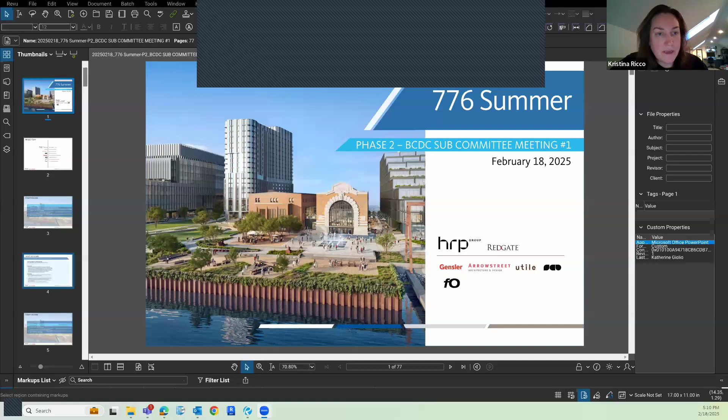Next slide. Quick glance at our project team, who Kristina is trying to feverishly onboard. Today, the focus will just be with FO and Gensler, as we'll be going through the agenda in terms of public realm and urban form. But just as a note, we do have all of the project team members here in the event there are any building-specific questions. Next slide.

For tonight, we understand we're the only item on the agenda. Thank you for that, and we want to be able to talk you through our material here.

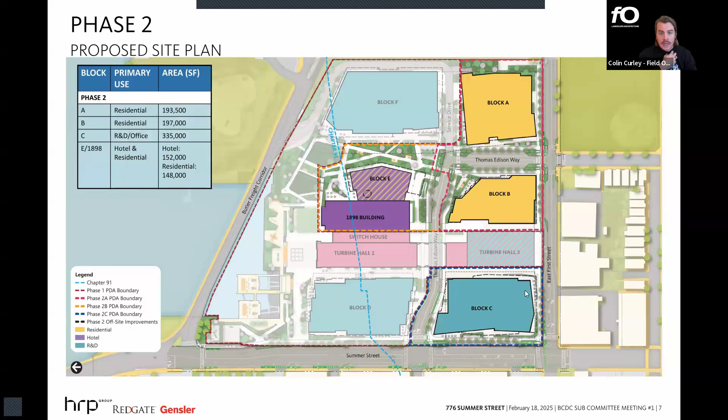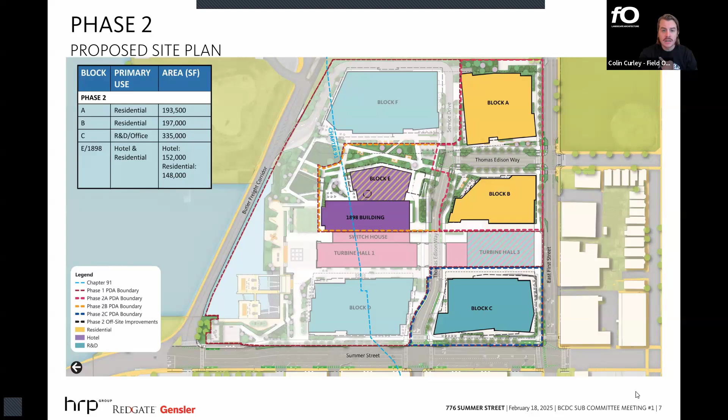Now looking at the phase 2 development: blocks A and B as residential buildings, block C as another lab office building, and block E together with the 1898 building as a hotel and residential building. Public realm is really the spaces around these buildings, streetscapes, and the Edison Plaza between blocks E and F. The next slide shows both phases together and the overall full build vision.

Moving to the next slide, we'll start by going through public realm. I'll start with this overall context slide, situating our public open space within the context of South Boston.

Next slide - let me speak to this one before we jump to the sections, to give an overall orientation. Our site high point is up at block A at elevation 36, and then the site slopes down like a table towards Summer Street. We're at elevation 21 at the freight corridor in Summer Street, and also at elevation 21 at the intersection of East First Street and Summer Street. We have a local high point in Summer Street at 22, where Thomas Edison Way comes out.

We're at elevation 30, where M Street and East First Street meet. Those are setting a lot of the elevations we're meeting at the edges, as well as what we're able to do in terms of taking up those grades on the interior of the site.

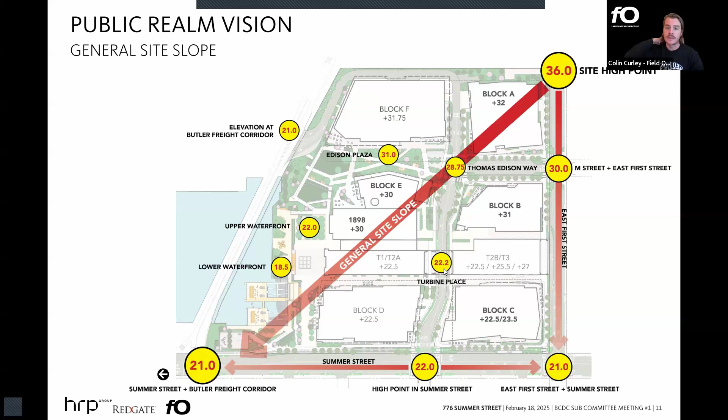Two other quick spot elevations I'd draw your attention to are the 28.75 at Thomas Edison Way, where we're meeting East First Street, and then we need to come down and meet the turbine halls down at elevation 22.2. So there's some stress on that portion of Thomas Edison Way.

If we could jump to the sections, we can set a little bit what's going on across the site. This site section is cutting through Block F and the lower waterfront. We have a tiered waterfront strategy for resilience. On the left-hand side of the section, there are some terraced lawns making their way down, and the lower waterfront is at an elevation of 18.5.

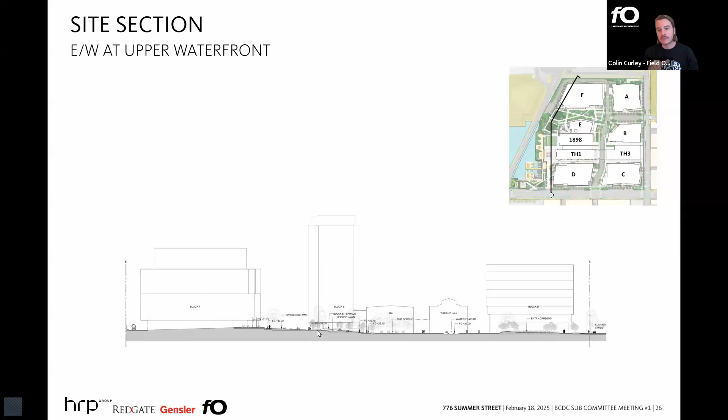If you go to the next section, this one's cut up a little bit further, cutting through the upper waterfront, at around elevation 22. On the left-hand side, there's a series of sloping lawns and pathways making their way from the Edison Plaza down to the upper waterfront.

Next section, this is Turbine Alley. This is fairly level, we're keeping this all around 22.5, consistent with the waterfront. However, there's a tiny blip here - we'll see it in 3D later - but we do need to make a grade transition to meet East First Street on the left-hand side of the page as it's climbing up.

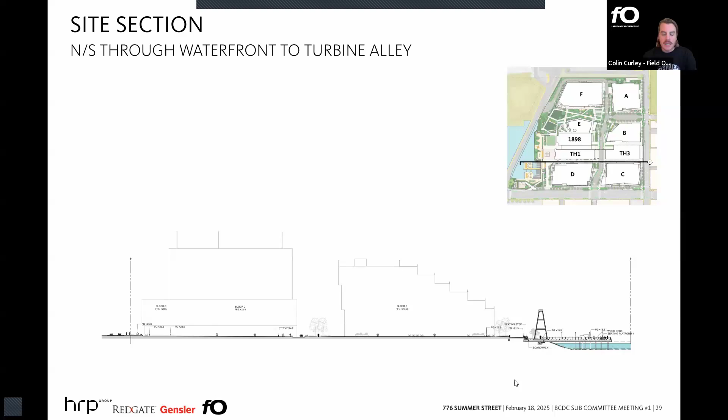The next section is just mirrored, so now you're looking back towards Blocks B and E. Grades here are holding pretty steady and then sloping down towards the waterfront on the right-hand side. I think that's it for sections.

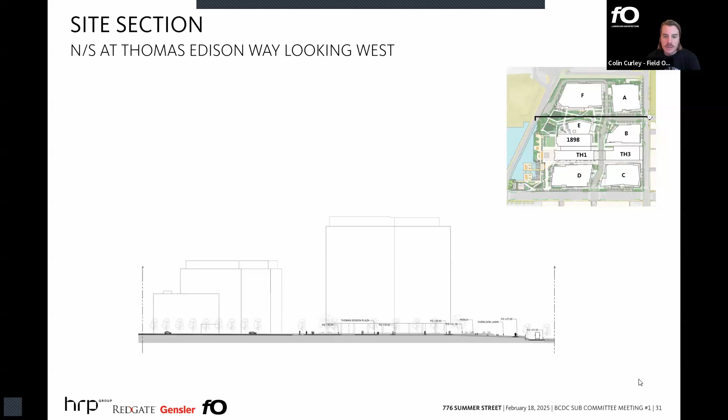But here again, just wanting to point out the grades around the perimeter - 22.5 at Turbine Alley, 30 at M Street, 36 at A. So we're working internally to try to set these elevations to maximize the amount of street frontage that each one of these blocks is able to have, to strengthen the connectivity to the public realm and surrounding streets. The next two slides are just enlarged grading plans we can come back to if we need to.

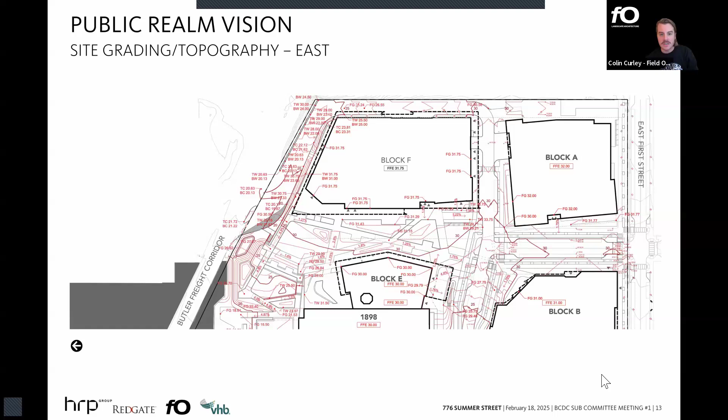If you go to the next slide, we have a series of 3D drawings to help walk through some of the grade change here. This is related back to the overall open space precincts. You can see the Edison Plaza, as I was mentioning in the sections, hovering largely at around elevation 31.

At the center of the site, the turbine precinct is predominantly at about elevation 22 - that's Turbine Alley. We're really trying to meet that elevation, though it does climb as you make your way up to Thomas Edison Way to around 27. The lower waterfront, as that first section indicated, is a bit lower at 18.5.

The upper waterfront generally at 22, trying to keep that consistent with all of those buildings as well as Turbine Alley, but it does climb up again to meet Edison Plaza. And then the Summer Street Gateway, really looking at meeting the grades of Summer Street.

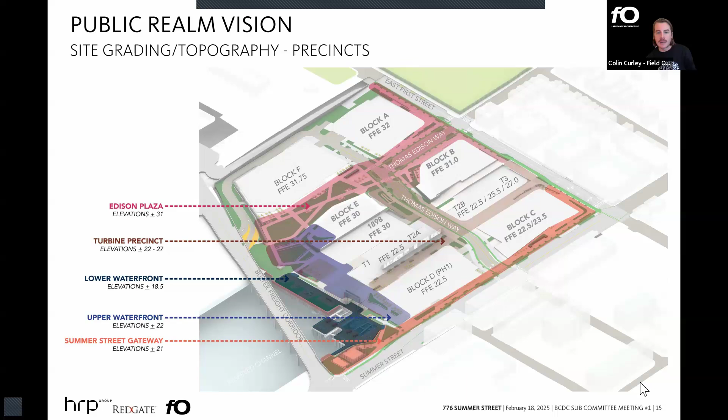Also looking at areas where we are taking up some grade to meet resilient finished floor elevations for blocks D and C. If you go to the next slide, we'll walk through some 3D views. This is looking southeast at the waterfront. You can see that kind of tiered waterfront strategy, upper waterfront around elevation 22, lower waterfront at 18.5 with accessible slopes mitigating the grade transition there, and block D and Turbine Hall at 22.5, 1898 being up at elevation 30.

So when we turn and look the other way on the next slide, you can see 1898 at elevation 30 together with block E, relating to that elevated public realm associated more with the Edison Plaza. And then those lawns and sloped walks that are making that grade change happen from elevations in the 30s down to 22 at the upper waterfront.

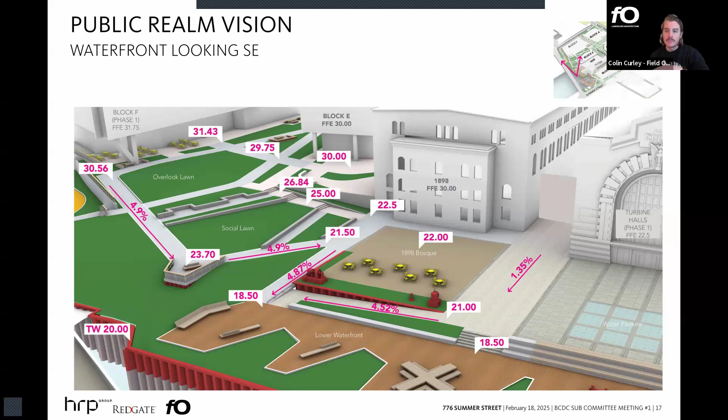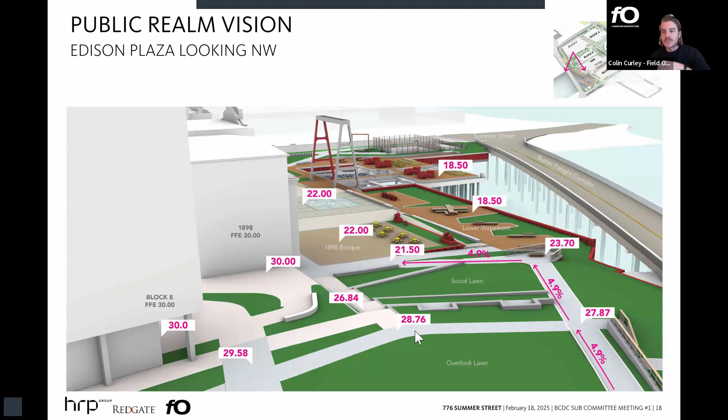If we go to the next slide, this is now turning and looking back towards the waterfront with that kind of overlook lawn in front of you. Block F would be behind you. So you can see here holding an elevated public space at block E and 1898 at around elevation 30, and the lawns and sloped walks making their way down to the upper and lower waterfronts beyond.

Next slide turns and looks down the Edison Plaza towards Thomas Edison Way. Between blocks E and F, this is a relatively level plaza. We've got seamless grade transition across and into building finished floor elevations, E being at 30 and F being at 31.75.

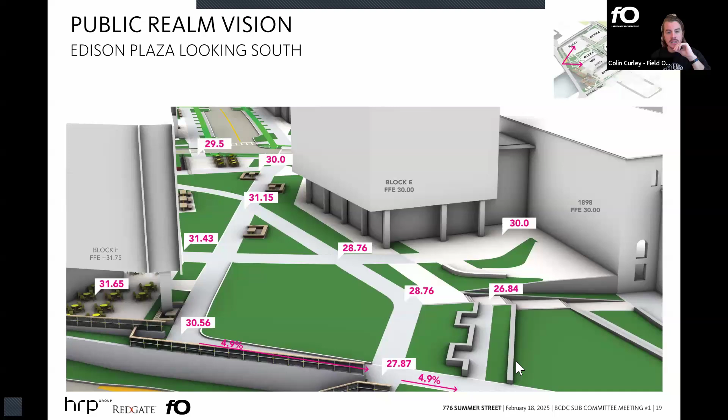We go to the next slide. Now we're moving into the intersection of Thomas Edison Way. I apologize, please disregard the 24 and 22.7. Those are errors, should not be there. That is nowhere near where we are.

We're up at 29 and 30 at this intersection. You can see the 31 off to the left. That's near the entrance of block B, so that's what's setting our finished floor elevation there. We're continuing to study this corner from a design standpoint, but here we're looking at a split strategy of an elevation 31 area associated with the building and a more public space down at 29.

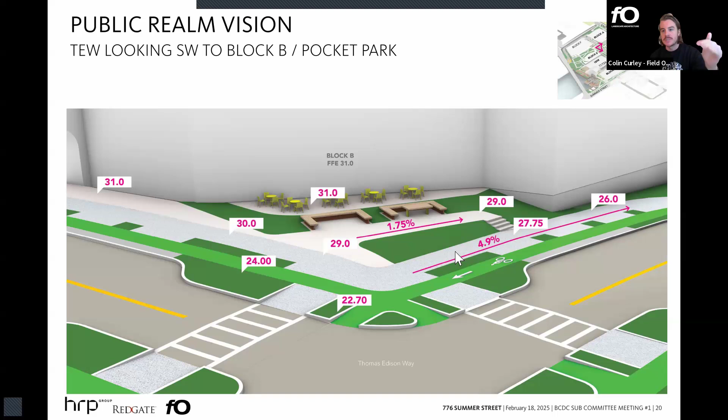But I mentioned before the stretch of Thomas Edison Way that's got some stress on it. You can see that really from that intersection going down, we're maxing out our sidewalk slopes to get down to the turbine halls. So if you go to the next slide, this is now turning and looking at block E.

Again, the kind of maxed out accessible slopes along the sidewalk so that you can make your way down to turbine halls, but then also creating that flush hotel and residential drop-off zone, meeting block E's finished floor at 30. So we have a 4.9% slope coming up to it. We've also introduced a stair and switchback path in front of the drop-off there that provides direct entry in line with the hotel.

So bringing you up to that flush pickup drop-off zone. And then you can see in the background there that driveway diving down to meet the loading elevation, and then the plaza again hovering at around elevation 30. The next slide just switches around, looks from the turbine halls back up. So you can see really the sidewalk being that accessible path of travel coming from the turbine halls up to the Edison Plaza.

That switchback near where Kate's cursor is right now being the kind of accessible path, taking you back up in a more direct route to the hotel entrance. And that 9.5% slope there being for vehicles coming back down, headed either to Thomas Edison Way or to parking.

Next slide. Colin, while you're on that one, slide 22 - yes, I know we chatted a little bit two weeks ago about the service drive, and is that kind of what's in the front of that slide? I guess yes, so that's coming off of Thomas Edison Way.

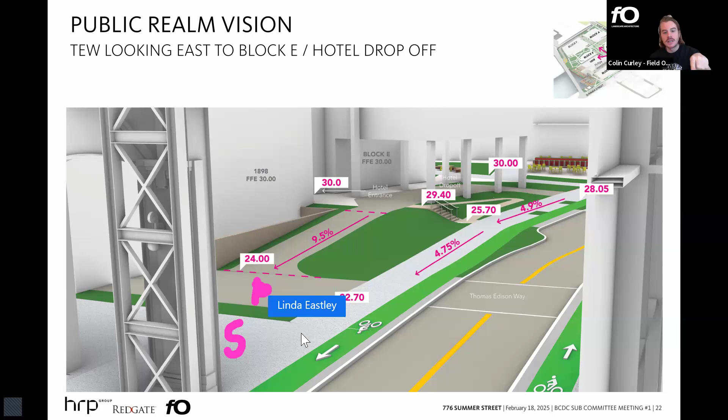So yes, this is service and this is parking. The tan is both service and parking for 1898 and the hotel. They're just separated by that planting strip. Got it.

So next slide, this is Turbine Alley. I mentioned the East First Street elevations are coming down. Where Turbine Alley meets East First Street, it's around elevation 25, which was already accounted for in the design of the turbine halls, so the turbine hall elevation at that corner is 25.5. Block C on the ground floor is at an elevation of 23.5, splitting the difference between Turbine Alley and Summer Street. That creates this condition at the corner where we have tiered seat walls providing a continuous flush accessible entry into the ground floor of Block C, and also facilitating the grade change from East First into Turbine Alley.

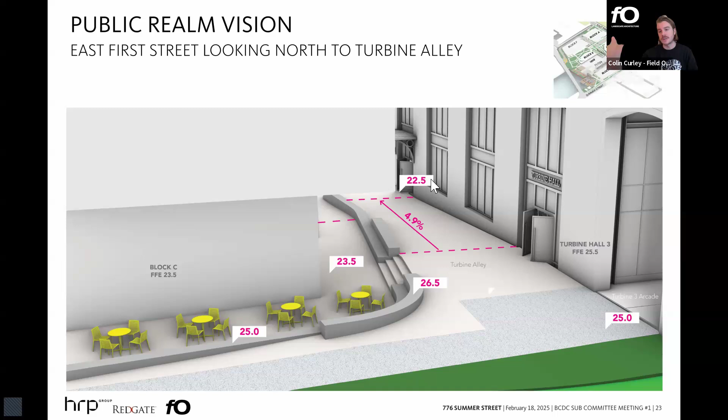Where you see the 22.5 tag, that's the finished floor of that entrance into the turbine halls and the remainder of the turbine halls as they make their way to the waterfront.

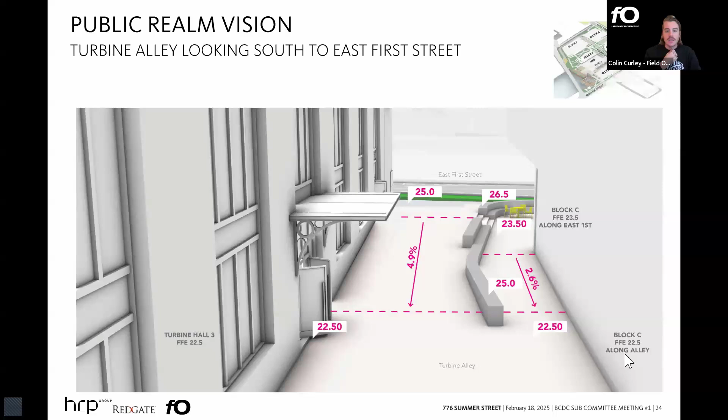So the next slide just takes that same view and turns around. You can see the seat walls mitigating that grade transition from the 22.5 of Turbine Alley and the rest of the turbine halls, up to Block C at 23.5, and back up to East First Street at 25 in the distance. Next slide, those are the sections.

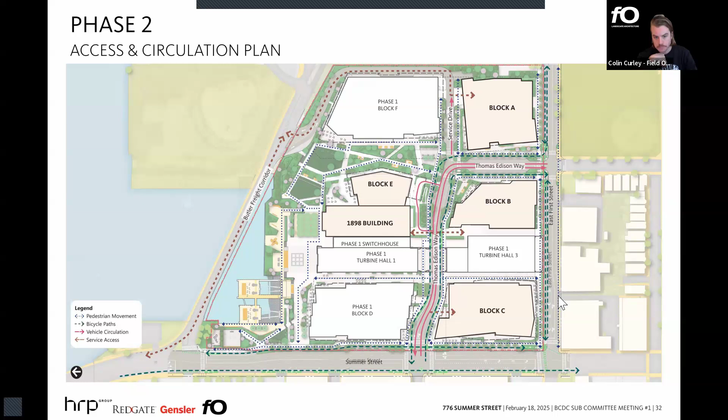And to your question, Linda, we'll talk through quickly the overall circulation, parking, and loading across the site. The red lines are the vehicular circulation along Thomas Edison Way, as well as that loop for the hotel pickup and drop-off at Block E. The brown lines are the service access, so for many of the buildings that's coming from Thomas Edison Way or the service drive via either Thomas Edison Way or the freight corridor. The dark green lines are the bike circulation, and the dashed blue is the pedestrian movement. The next slide illustrates the parking and loading entries.

And I think with that, I'll pass it over to the Gensler team.

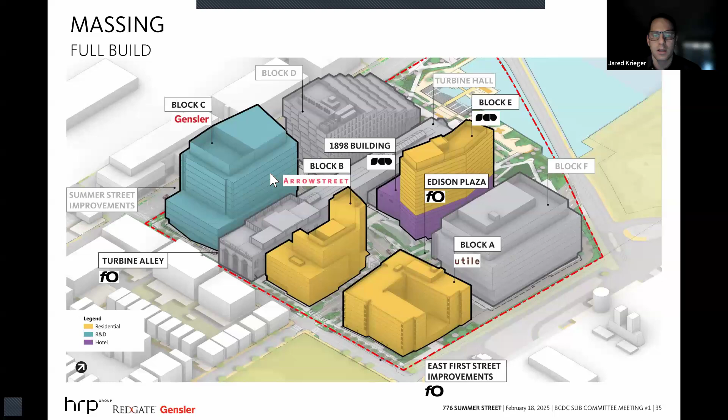Ultimately, what we're calling just a really hardworking street, as well as orienting active uses both on the outside of the site and the inside of the site.

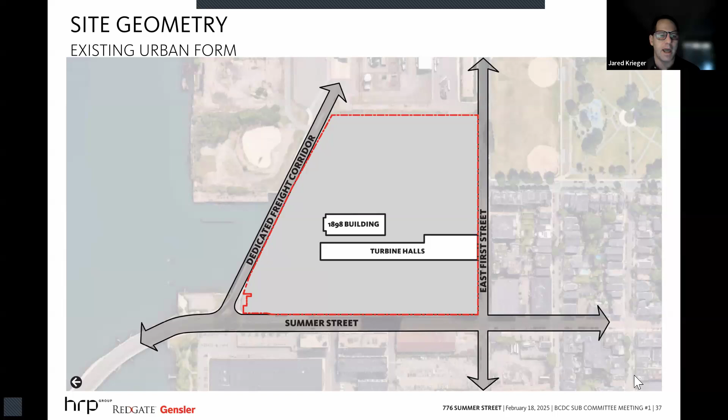Starting with the progressive build of the site, the rectilinear edges create the perimeter, with East First Street and Summer Street coming together at a right angle. The dedicated freight corridor cuts at an angle through the site, setting up the boundaries. The 1898 building and the turbine halls are historic, rectilinear, and really unique assets that the site has.

As we started with the planning, other groups collaborated on this with the team. Elkins Street and M Street were meant to cut through at 90-degree angles, keeping it orthogonal like the site, but there were certain site constraints that prevented that from happening.

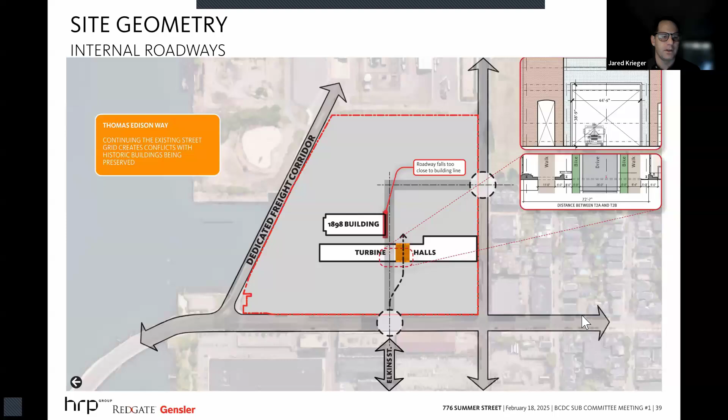When you looked at trying to get a road through the existing turbine halls, we jogged the road to the south to coordinate with specific structural bays, trying to coordinate lintels and removal of structure, while balancing how close we were to the 1898 building. Fitting a roadway, sidewalks, and bike paths through appropriately, while giving a buffer to the 1898 building, led to the geometry being a little more dynamic and jogging to the south.

The benefit was enhancing the pedestrian realm. We really want to celebrate the turbine halls by giving this buffer and stepping back from the 1898 building, because if the roadway ran directly through on the Elkins Street axis, there basically wouldn't have enough room for a road and a sidewalk — it would be right up against the building.

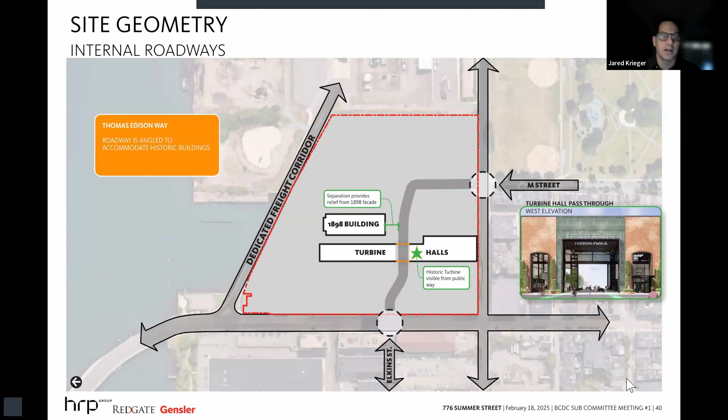This creates pretty unique geometry that activates and differentiates what's happening on the inside of the site versus the outside. This shows the setbacks and all the different energy created through Edison Way coming through on the site, rather than being at orthogonal angles.

Another big component of how the plan was devised was thinking through how we can connect from the existing Medal of Honor Park, showing a wider view of the multiple green spaces being connected. For a long time this site sat as a disconnecting point for potential pedestrian pathways, so this walks through connecting Medal of Honor Park through the site, not just focusing on the vehicle, but also the pedestrian.

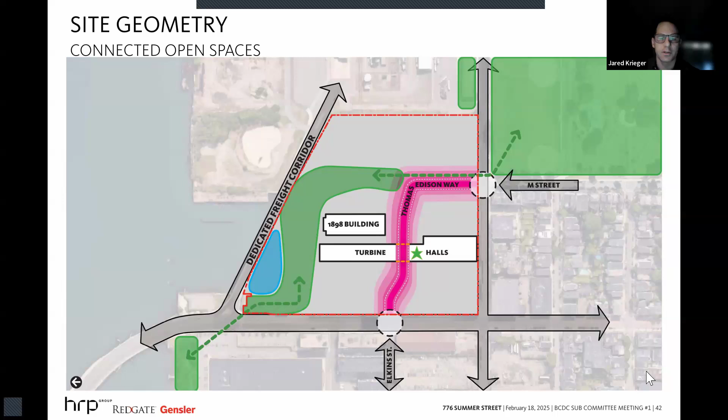Ultimately it created something really dynamic in the middle of the site. The commission noted last time that the circulation patterns meet at the intersection of Thomas Edison Way there, and we feel that's creating something unique, as vehicles turn one way or another while pedestrians potentially open up to views toward the open space and waterfront.

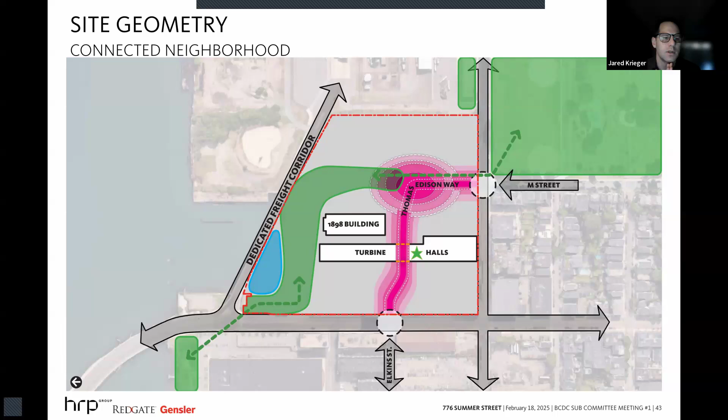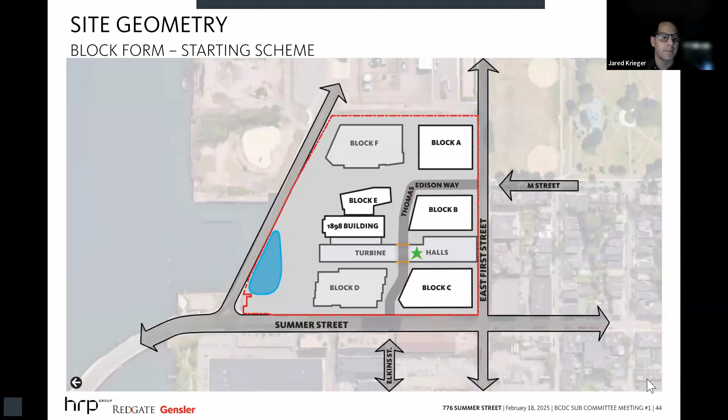Now, if we start to lay on some of the simple forms, this shows on phase 2 what the simple buildable parcel geometries could be. Then we start to layer in certain angles, pedestrian and view corridors to give visibility to 1898, and as brought up, the potential signature piece that is block E at the center of the site.

As the pedestrian gets further into the site from these critical vantage points, that starts to indicate some of the carving back for the buildings and driving the building geometries. As you get to Thomas Edison Way and into the plaza space, it continues to open up the views into the plaza and beyond.

When you're on the higher topography, as you come around, there are incredible views of the skyline and beyond. Same on block C — using that to our advantage, the angular roadway gives an excellent view of the turbine halls, but also gives us the advantage on block C to articulate the architecture to screen some back of house functions, like the loading dock area.

Layering it all together, it creates a really dynamic space right as you're entering the site at the bend of Thomas Edison Way.

That's where we really have a unique moment, and the architecture of the buildings is starting to address that. We're going to show this a little bit more in some three-dimensional views.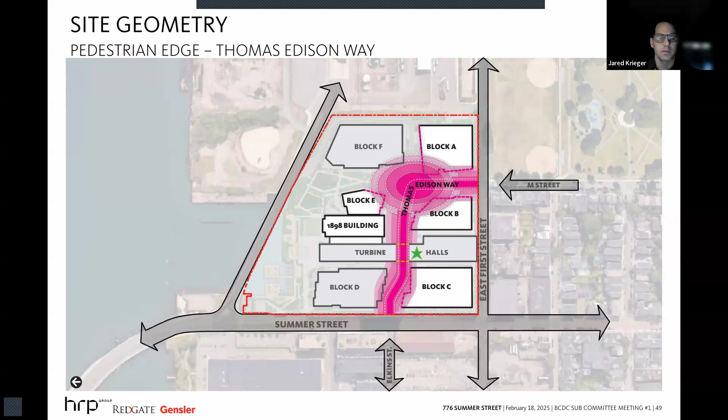On the outside of the site, along East First Street, one of the constraints we've had from the beginning is that turbine hall 3 basically sits right on the edge of East First Street, and there isn't any room for a sidewalk there. So that created a pretty unique opportunity, special to this site, to bring an advantage to the pedestrian experience by actually circulating through the turbine halls. As you've seen in earlier presentations, that's basically a connection throughway wall, while we preserve the turbine hall.

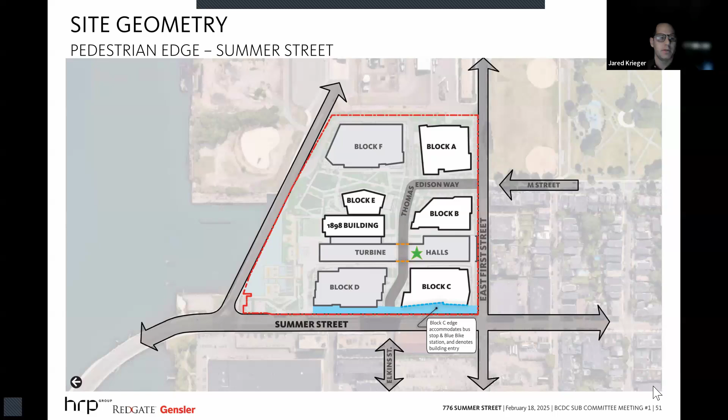This really enables the blue bike stations, adjacent to the program bike storage spaces within the building, to create synergies between what's happening inside and outside the building. Similarly along Summer Street, you'll remember block D from phase 1, where there's a push into the building, a notch, which denotes the entrance. We're making a similar gesture on block C, moving it in a bit more, also making room for the bike station, the bus stop, and the pedestrian circulation out there.

Ultimately, this is the full build of the geometry of the master plan, which we think, using some of the unique forces that drive the master plan, whether under our control or not, really creates something dynamic in the site.

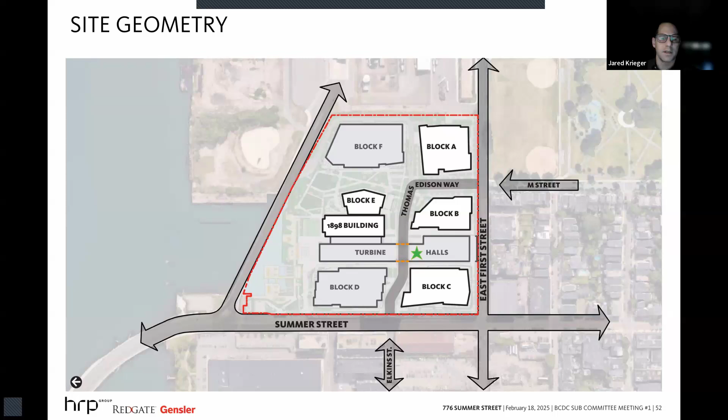The remainder of the presentation will focus almost entirely on the 3D pedestrian level experiences throughout the site. We're going to take you through 4 diagrams and 4 animations, which will take us to the finish line. Thank you for your patience in this thorough presentation.

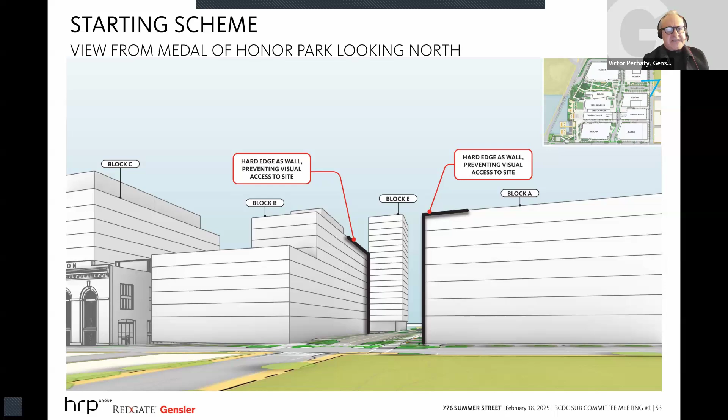This first view is focused on the experience looking into the heart of the site from Medal of Honor Park. The building forms you see are based on the zoning-defined envelopes. If I can call your attention to the dark outlines on blocks B to the left and A to the right, those are the areas you'll see begin to get modified based on the criteria shared by Jared.

Next slide, Kate. This is the proposed view that indicates on block B the upper 4 levels have been recessed to separate an upper portion of the building from a base. Block A has been subdivided into 3 different massing forms. The form in the foreground has been rotated to help open the view and frame the view beyond. Block E has taken on a small angle, which will be viewed better in the diagrams to come.

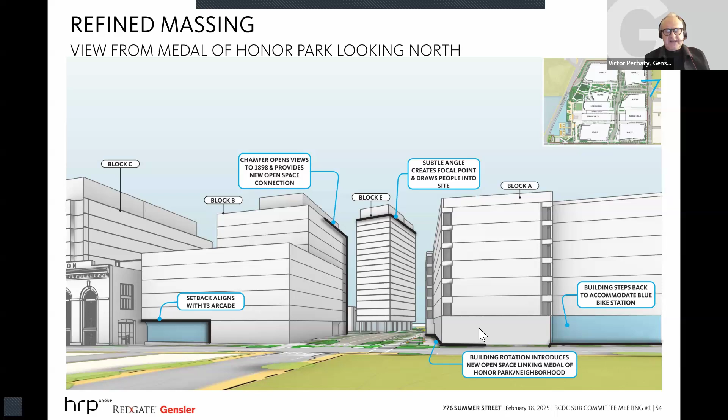Next slide. So what we'll do next is show you 4 slides that will preface the 4 animation paths that we will take through the site. And Kate, you can go to the first one.

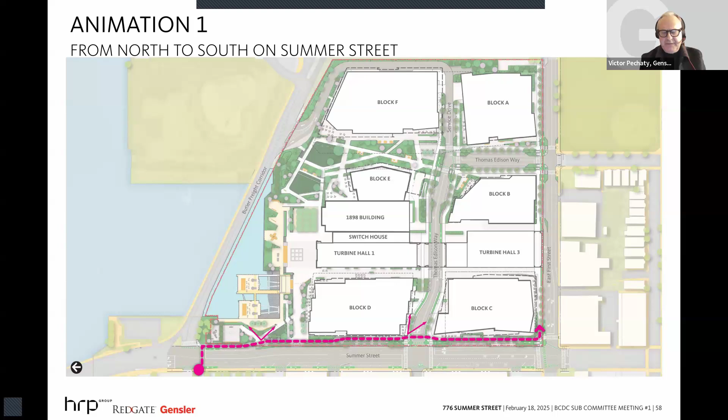Basically, 2 of the animations are going to focus on the primary site perimeters, and 2 of them will go right through the site. The first animation will walk along Summer Street, beginning at the north and moving along the blocks towards the south. The next animation will take us all the way along East First Street, going from west to east.

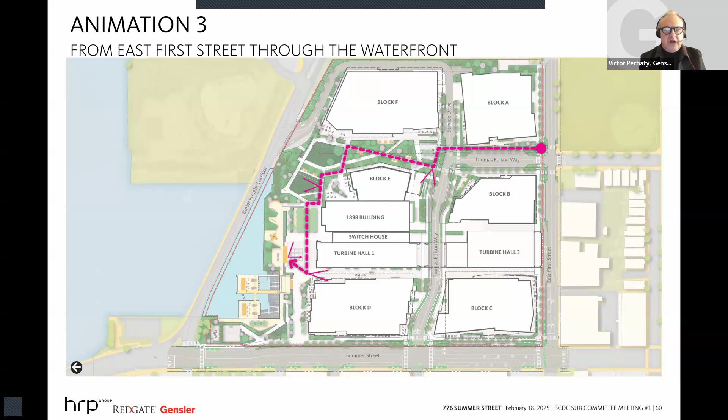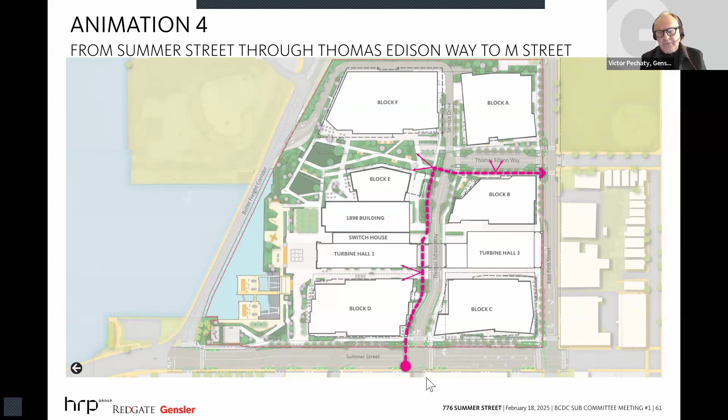Passing through the Turbine Hall 3 arcade and the buildings on either side of it. The next path will take us from Medal of Honor Park along between blocks A and B, and has chosen a path to navigate through Edison Plaza and along the waterfront experience. And lastly, we'll enter the site at the intersection of Summer Street and Thomas Edison Way, follow Thomas Edison Way the entire way through the site to the point where it makes a right turn in Block E and reconnects to East First Street. So if technology cooperates well, Kate, let's go ahead and kick off the first animation.

Thank you. So here we're going to cross over Summer Street, looking eastward. As we turn to go south, we're going to walk by a dog park and an outdoor recreational sort of half-court basketball court to our left.

As we pass by that, we will turn towards the east to get a quick overview onto the waterfront promenade. You can see some of the historical artifacts that will be preserved from the Edison power plant.

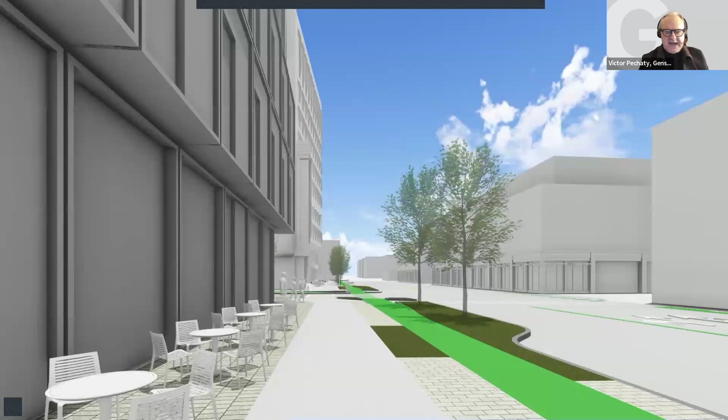Now, as we walk along the facade of Block D, this is the inset portion of the mass that frames and signals the building main entrance. And then the remainder of Block D at the sidewalk level is set 5 feet back from the setback to help provide some better indoor-outdoor relationships.

Here we're arriving at the Summer Street, Thomas Edison Way intersection with the 4-story base of Block C beyond that we're passing by now. The west face of Block C folds inward from both intersections, again, to signal architecturally where the building entrance is, create an alcove for the blue bike stations, as well as a linear plaza that will welcome transit riders that are getting off the bus on Summer Street.

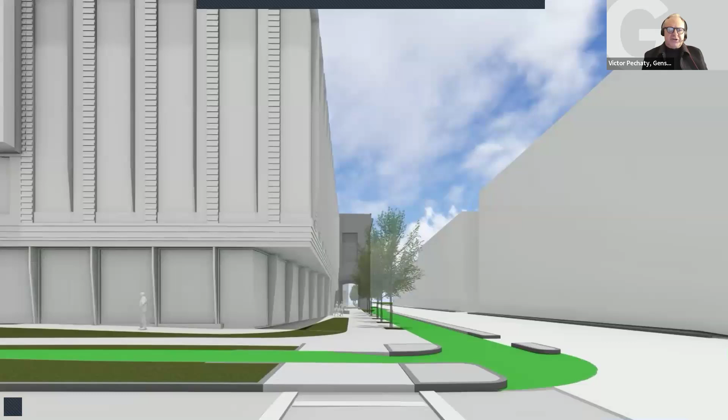Okay, Kate, whenever you're ready, we can go to the East First Street animation. Thank you. So this one's a better view of the 4-story tall podium at Block C, which helps bring down the scale of the 10-story building.

The first level of Block C folds away from the setback line. Here we see it folding toward Turbine Alley in deference to the new arcade that passes through Turbine Hall 3.

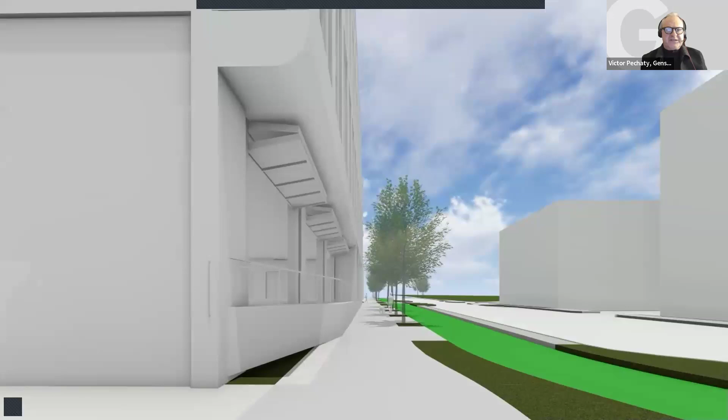On the other side of the pass-through, Block B also has a recess at the base to ease the transition from the arcade. As we move along the first level of Block B, we haven't coordinated doors and access yet, but those are all storefront retail openings.

Here, we're crossing over Thomas Edison Way, and to our left, this provides a good view of the plaza created by the rotation in the Block A mass, and we can see the view towards Block E beyond.

Finishing the journey along East First Street, you'll see Block A pull back from East First. It's something Jared mentioned in the plan to create a generous alcove to host the blue bike stations, the storefront behind those providing some of the bike amenities for residents in the building.

Okay, Kate, whenever you're ready, we can jump to the waterfront experience. So we're beginning with Medal of Honor Park to our back here, and we're walking northward along Block A. The Block A Plaza extends to the Block A residential main entrance, which was just off to our right.

As we continue to move north, we're going to turn briefly down Thomas Edison Way to show the portal through the turbine halls in the distance.

As we cross over and move a little bit to the west, it'll bring us closer to see the porte cochere drop-off that serves the Block E hotel and residential.

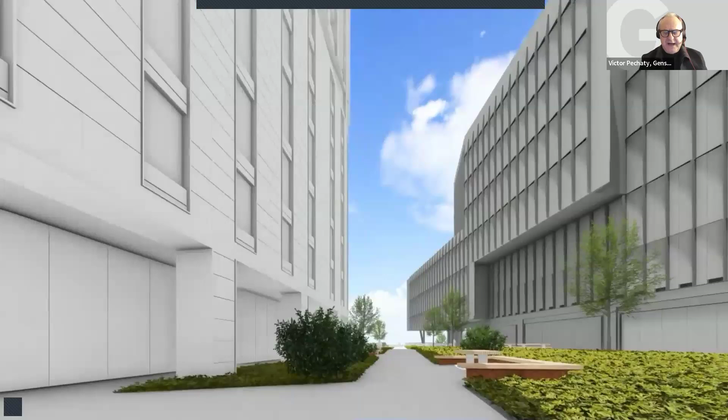And now, once again, looking towards the north, we'll pass through the Edison Plaza as we make our way towards the waterfront. The inflection point on Block E folds back away, really allowing a wide open view of the waterfront from Thomas Edison Plaza.

Here, we'll turn left back towards the west and walk down the terraces of the waterfront promenade as we negotiate the elevations and the various terraces that Colin had shared earlier.

As we get to a lower elevation, we're going to flip the camera back and you will see some of the new large openings that are proposed for the 1898 building to really open that up to the bosque of trees that we are walking through right now.

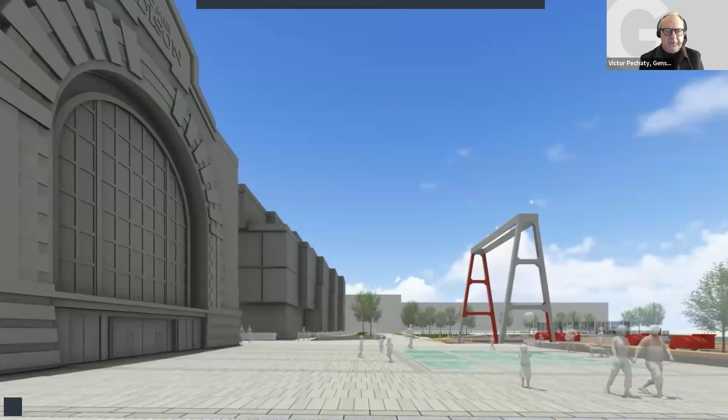I forgot to mention something very important. These dark gray masses focus on the phase 1 buildings, and the lighter gray are phase 2. That was something you requested, and I apologize, I didn't mention that earlier.

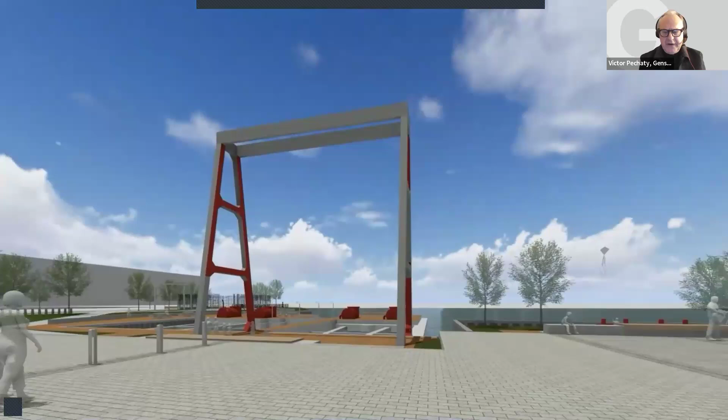Here we're going to turn all the way around, and in our foreground will be a proposed water feature that's part of the front plaza of the 1898 building, and we'll stop seeing the Turbine Hall 1 facade in our foreground and 1898 directly adjacent to it.

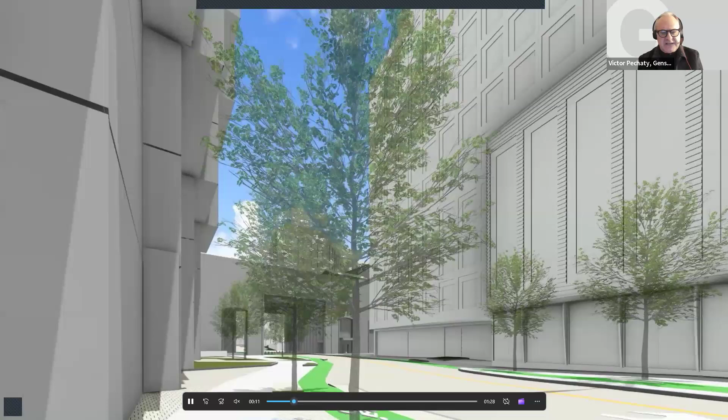Okay, one more to go, Thomas Edison Way. Here we're crossing Summer Street, and we'll follow Thomas Edison Way throughout the site. You can see the entrance into the site bookended by the 4-story prow on Block C, as well as the massive Block D. We'll follow the sidewalk along the serpentine jog in the street that frames the approach into this portal.

The portal is designed such that—Kate, may I ask you to go back a little bit? It jumped for me just a bit. Just a little bit of a glitch there.

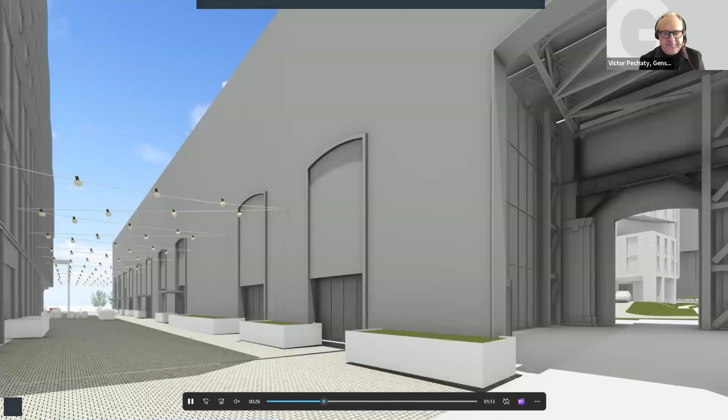Thank you. So here we get a peek down Turbine Alley towards the waterfront, and then through the portal, it has a nice separation between a pedestrian-only experience as well as a vehicular experience.

This movement provides a good view and experience of walking up the grade to the higher point of the site, with the porte cochere to the hotel framed in the view now. You can see the car as if it's exiting the hotel drop-off.

As we arrive at the higher point of the site, we'll take a quick look to the left, which looks out onto the waterfront. And then we will turn and walk down Thomas Edison Way towards M Street, where we'll see both the base of Block A and Block B.

Both blocks are lined at the base with transparent storefront that is all active program, one of three programs: either retail, building amenities, or building lobby. So all of this entire experience along Thomas Edison Way is highly activated. And we're stopping here looking west on East First Street.

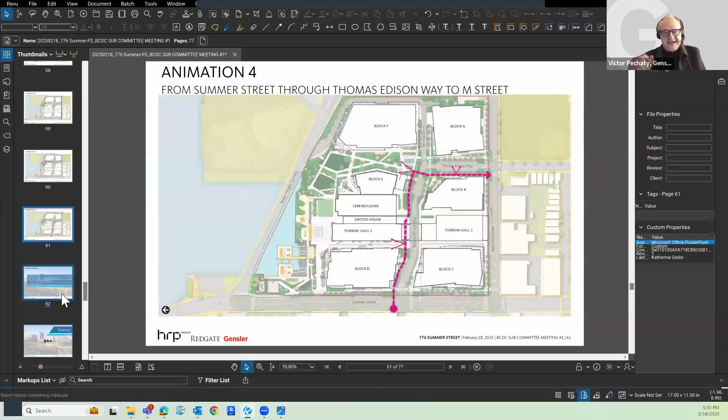Thank you for listening to that marathon of narration. Melissa, I'll pass it back to you for, I believe, our closing slide. Or Ernst, I'm sorry. Nope, all good. Appreciate that, Victor. So appreciate the patience.

I'll echo Victor's comments there, commissioners. I appreciate the patience through that, but we do hope that we were able to provide a lot of the views and thoughts and ideas that you'd presented prior. With that, Christina and team will turn it over for any questions and answers.

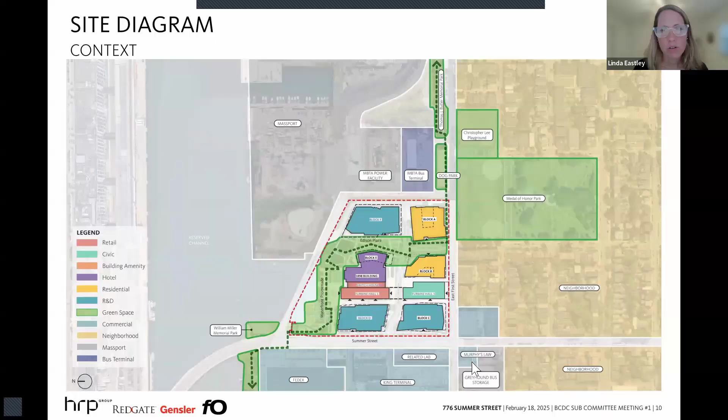One of the things I was looking at was slide 47, if you don't mind going there. In slide 47, we see a much simplified geometry of Block A, and in some ways it's more in keeping with the geometries of B and C because you've got more sides that are parallel to one another. I know one of the things we talked about two weeks ago is why we have the twist in Block A, and the reason this is coming up for me now, and why I wanted to look at this diagram again, is that I'm not really sure how to think about that Service Drive spur.

It either wants to be a pedestrian realm or it doesn't. I think having Block A twist and offer a pedestrian realm there is a bit confusing, because I don't think it's really a block you're welcoming pedestrians into. So I think it all gets connected, and I wonder if the team could think a little about how we change the primary nature of Thomas Edison Way and the way it makes that 90-degree turn out to East First Street, and how we think about that Service Drive spur.

Can there be some visual cues that tell a pedestrian that block really terminates at a dead end, and maybe has a different streetscape character, so we continue to focus on the primary nature of Thomas Edison Way. So for me, having a simpler Block A and a different street section for the Service Drive go hand in hand in providing clarity for the primary Thomas Edison Way.

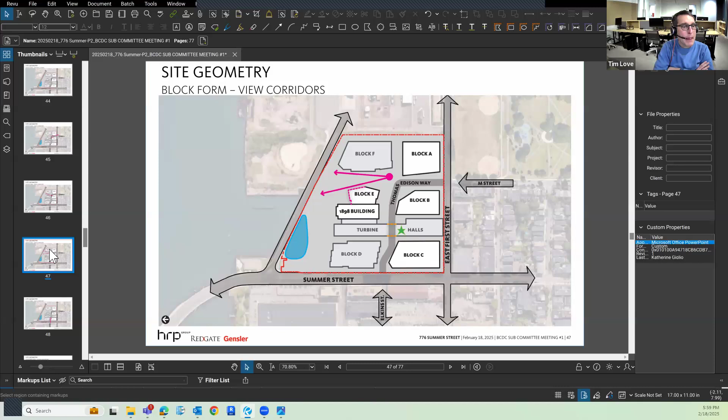Yeah, and I think that was slide 36, maybe, Tim. At least that's what I jotted down. Yeah, so again, the street section looks really similar to me, further down Thomas Edison there. And then any comments on the turbine alley?

Yes, we would at Gensler also be pleased to speak to that. That's sort of the realm we're working on between Block C and Turbine Hall 3. We could start that conversation now, but I am noting that other commissioners have comments. So should we hear those first and come back to it?

Well, I guess at the most elemental level, even if you look at this illustrative, there's really nothing interesting that's being shown here in terms of the urban experience along Turbine Alley. So I'm just curious about that, curious why it's not part of that open space diagram we looked at a second ago, and kind of what your thoughts are.

Yeah, and I could jump in, Victor. From the diagram's perspective, it was kind of linking some of the major open spaces. Linda, what you had said earlier, we totally agree that it's an important space for connecting, especially if you're coming from east of the site along East First Street.

I actually think it's going to be a very impressive alternative to going down Summer Street and then turning right into the site. You probably saw it in some of the 3D views better than kind of the diagramming. We actually agree that it's going to be a very special experience.

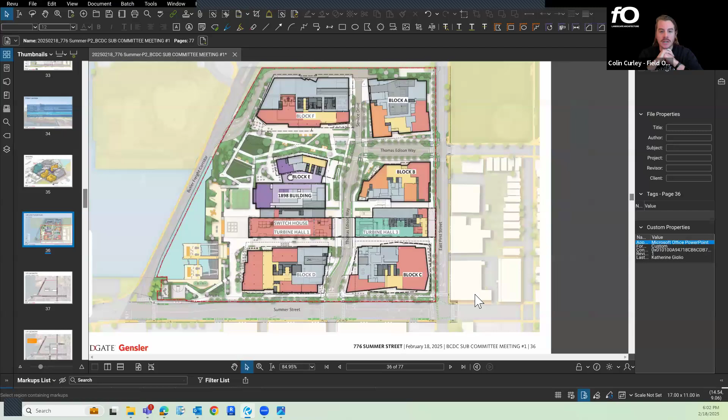And so I think we've been trying to think about it sort of in its entirety—where is the destination, where do you want to stop, and where are you kind of passing through. But definitely comments are heard, getting into more of what the character of that space really wants to be along that stretch.

All right, great. I mean, your graphics may just not have caught up to kind of some of the ideas that are bubbling. Sure, so look forward to seeing that in the future.

Shauna, I saw your hand up earlier, but I don't see it anymore. No, it was it. I took it down just because I thought it was time for me to start talking, and I usually forget to take it down.

So thank you. And I think the presentation was extremely exciting. There was a lot of information. It was a little hard to follow just because there was so much information. And I think it's an extremely exciting project.

I might as well start with Turbine Hall. I was actually going to end up that direction. No, actually, I'm going to start with the other spaces and then come back to Turbine Hall.

I think that's a very exciting project. When moving through the green spaces, what's called the Thomas Edison Plaza, but is primarily green, and a lot of the other spaces—it may just be the focus on grading and representation—but a lot of it felt more like passage spaces and green spaces. It could possibly be just the level of development the project is at, but I'd like a better sense of how these spaces are subtly differentiated from each other and what actually takes place in those spaces.

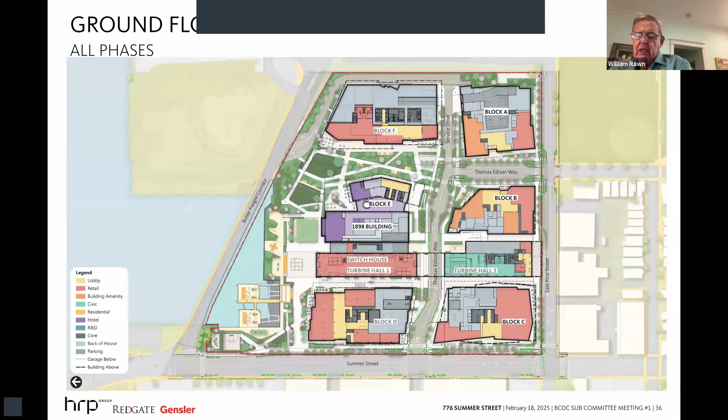Can you show me a view looking from the north down Summer Street to the edges of Block D and Block C? And this would be elevation or perspective. Kate, I'm almost thinking that if we go to our animation and pause it, that might be best for what Commissioner Rawn's looking for. Perfect, Victor.

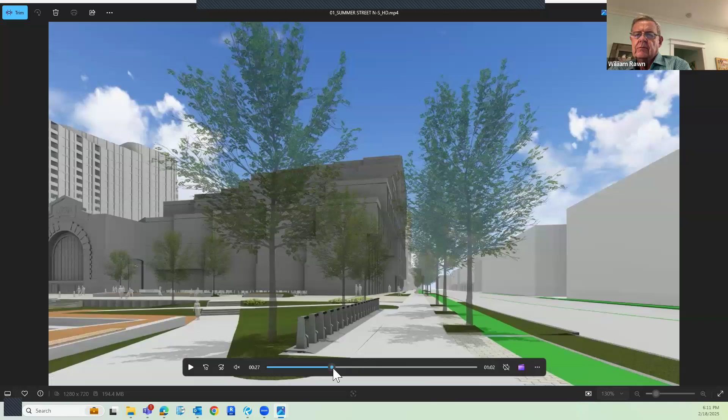Okay, well, let's stop right there, and then we'll let... now can you back up a little, Kate? Okay, we can stop there, and then we'll go down the block a little more.

I am troubled by what seems to be a pattern of architectural moves here, of having the upper floors extend over the sidewalks in a way that makes those upper floors feel bigger and heavier. So you see that—I'll call it the third floor overlap here, and then the fourth floor overlap.

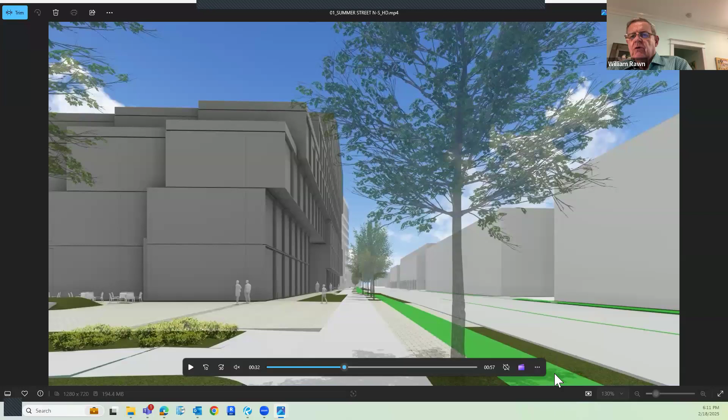Then go down the street a little farther, Kate. Here it comes again at the second level, and then keep going, please. All the way—why don't we go to building C?

Okay, and right here is fine. So these are 3 or 4 examples of where the upper floors extend out over the open space. And I'm feeling these buildings are big. We grant you that, but at the same time they're potentially quite handsome. And I don't remember that building C two years ago had that much of an overlap over the spaces below, but I could be wrong.

But I'm finding this repetition along Summer Street of extension of upper floors to be disconcerting if one's trying to master the question of heaviness and mass and girth of the project. And so I would love someone to explain why these overlaps are necessary architecturally and whether they can be reviewed.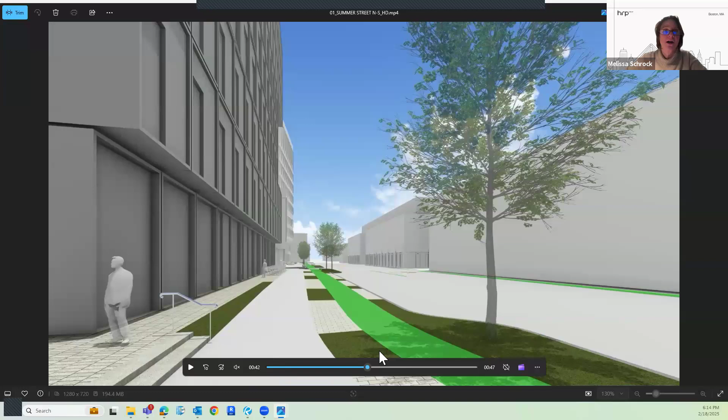And how about building plot site C? D is... Block D is within the footprint and the mass that we have been looking at for many years. In fact, it's under the square footage that was originally approved in the master plan. We went through the phase 1 approval with Payette, the architect of this building. They're not here tonight because we've already been through the BCDC process and the BPDA board with them.

So those insets that you're referring to were actually design moves that we worked on largely with you guys, but also with BPDA staff, in order to create a little bit larger public realm and also to denote things like where the entries are, where the corner is as you're coming up to the street. Those were specific design moves worked through quite some time ago.

Well, I apologize for bringing up something one can say we reviewed and approved—it's okay—but I must say, if we're looking at these buildings again, I'm just finding them seem much heavier than I remembered, and so I was trying to figure out why. Maybe I'm wrong on how I assess that, but I do find there's a heaviness and not a lightness to these buildings whatsoever along Summer Street. And I'm worried about that.

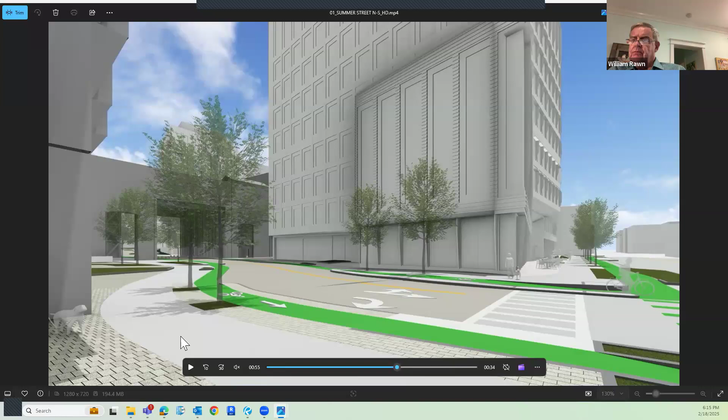We hear your comments. I would just hope that we're not going to relitigate Block D, because it's in CDs at this point. And Victor, I think you could probably address some of the commentary on Block C. Yeah, so just a quick summary of where we are here on Block C.

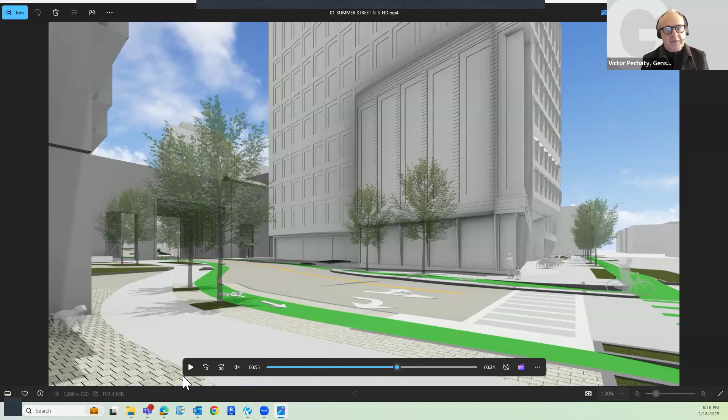We have a series of diagrams that I'm sure we'll come back to when we talk architecture, but we essentially began with the zoning envelope and then carved away at it in multiple areas through this folding morphology. On the Summer Street facade, there are essentially two intersecting moves.

So what we can see here is the outermost point. The outermost point on what we call the upper mass is the only point along that facade that actually touches the 30-foot setback from Summer Street.

In order to address some of the comments on heaviness, we created this crease in the center and folded the facade away from that crease. So whether you're looking at the building from the north or from the south, you're really perceiving only half of that facade on your side of the crease.

And then at the lower portion, which creates the overhang, none of that base actually comes all the way to the 30-foot setback. It is all pulled back from the setback and then further folds inward to architecturally communicate where the building entrance is.

As I mentioned, this creates a linear plaza along Summer Street, both to give that pedestrian space a little breathing room, accommodate the bikes, and some outdoor programming for retail. Now, the resultant of those folds is that a portion of the upper mass hangs over the lower mass, which we think provides an inherent canopy and shelter for the entrance.

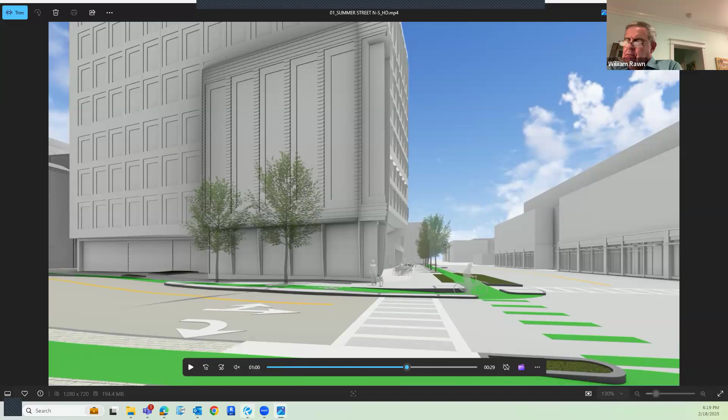Oh, thanks, Linda. Can we, first of all, I've got to join the chorus. This was really an excellent presentation.

And from the diagrams that explained your process and the animations, I'm thinking that when we have multi-building, multi-block projects, we should make it mandatory, if we can't have models and can't be together, to do that kind of walk around the site at its perimeter and through its major pathways as a pedestrian, exactly what you did. And I echo Bill.

You did it at a pace that most times when I see animations, I just want to tell you to stop, it's too fast. You get car sick.

Well, and I haven't absorbed it all yet, but the pace was really good. The thoroughness of walking around, I really do feel I understand it so much better.

Two or three things. Number one, if you could go to 47, which is the same one Linda asked you to go to. I found this to be very powerful. Is that 47? I'm sorry, then I got the wrong one. But I can use this one. Yeah, that's fine, maybe I have the right one. I have the right one.

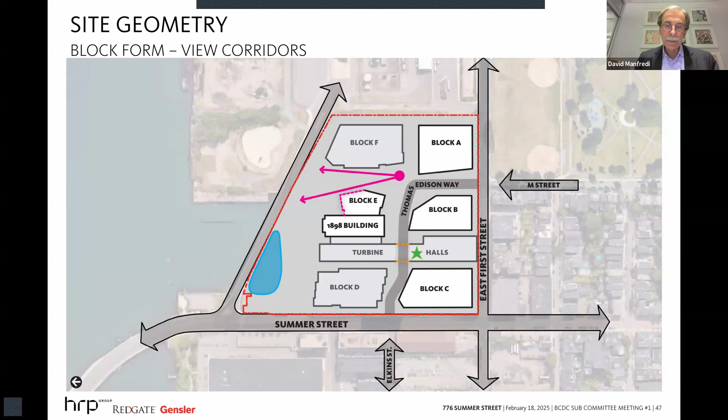That was once part of a whole, meaning this giant energy power plant, but that now is made up of these disparate parts. And I think as a diagram, that's really very powerful.

I struggle a little bit, and Bill and Shauna both hit on a couple things that trouble me, and they're related to each other. One is, I'm not sure yet what to think about the triangular pieces, which are mostly site related, a little bit building related. Is there too many of them?

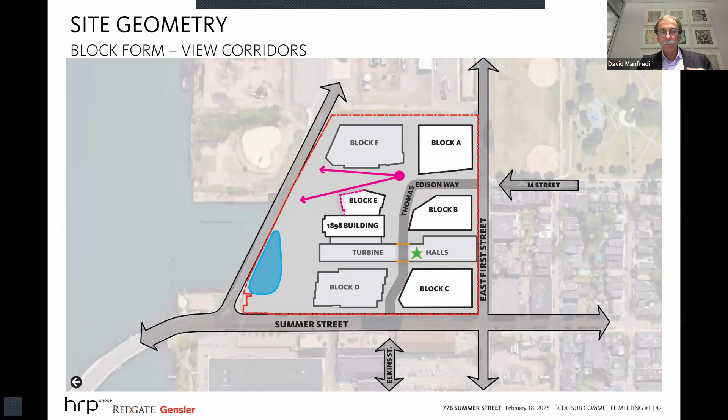Block D is very strong. I don't think there's any desire to go back and re-examine it, but I wonder if it's a theme used too often. That's one of the things from the walkthrough that I thought of.

Bill said it very well, he talked about the heaviness. As you walked us around all the perimeters, I was thinking about how there were a lot of places where things were over my head, and I wondered if that was comfortable as pedestrian ways. It seems to be a repeated strategy that maybe is used once or twice too often.

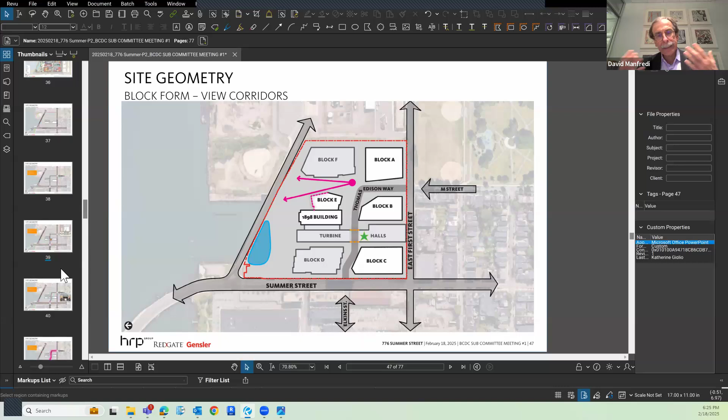There was a third point I wanted to make. The thing I'm still unconvinced of is at the very center, which is so important, where Thomas Edison turns, whichever direction you're coming from. There's an awful lot of vehicular intersection going on there - the drop off for the hotel, the access to parking, and the service. I get it, your service has got to come off Thomas Edison, and you want to get to the front door of the hotel. I was starting to resolve all that in my mind.

Then when I got to the animation, I guess I never realized, and I should have since you gave us all that grading information, that at that point the car is actually elevated at the drop off, which made it even more of a tangle for me. I wonder about that as a pedestrian, on the north side of Thomas Edison, with everything going on - my relationship as a pedestrian to the cars, crossing a driveway, a service drive, another driveway. I'm not sure whether parking's in here somewhere. The grades troubled me when I realized that car was up - I'm not sure how much, but above the sidewalk. When I was on the sidewalk and the car was up, it felt like almost eye level.

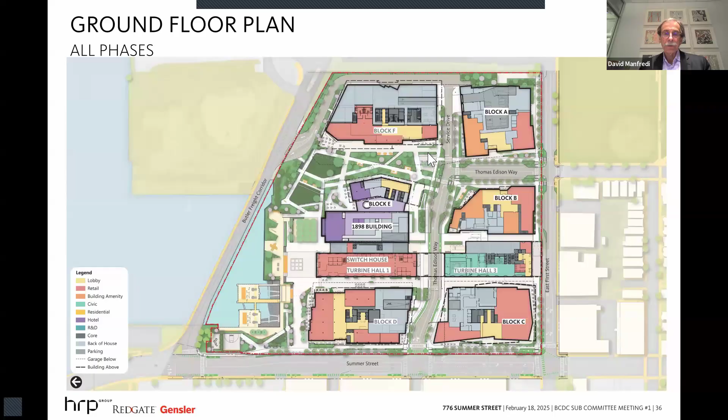I'm sure it's not that high, but I'm not convinced of what's happening on the east side of Block E as part of the public realm. I don't want to ask you to go through the animation again, but I would ask you to go through it again to see all those grades. But I'll repeat what others have said - this is a wonderful project, there's so many good things here about what you're doing, and I think we're focused on a few more things to look at.

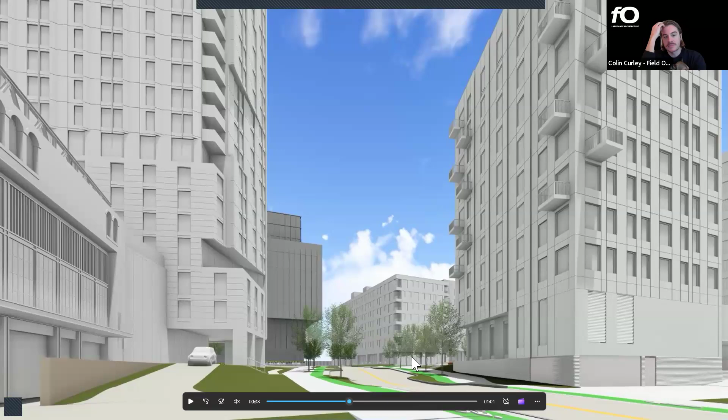It's obviously not the answer everywhere, but we did bias the drop off and the drive a little bit closer to the buildings in order to widen that planting zone between the sidewalk and the drive. The idea is that we could work with a plant palette to screen and make the sidewalk feel more welcoming, while also mitigating some of the visual impact of the cars there.

Answering Commissioner Eastley's earlier comments, there's a scrim of trees down Service Drive about halfway, separating the active pedestrian edge of Block A from the service area behind, which isn't quite clear in the diagram. You can see the row of trees, and behind it is really a service plaza, because there are active edges along that edge of Block A.

But when we get into the building by building subcommittee meetings, we can walk each other through it. Yeah, that would be great.

At that point, at the inflection of that road, I almost want the service drive to disappear or become narrower for that use, so it doesn't become a primary pedestrian zone. But the triangle—I liked what David said about triangles everywhere—that triangle encourages the pedestrian to hang out there, and I'm just not sure those are in concert with each other.